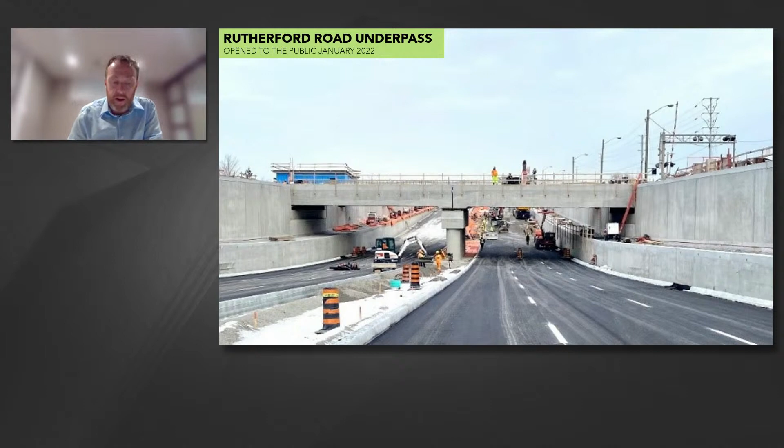Our next project is Huron-Ontario LRT. First, a note on the name: when this line comes into use, it will have a new name, the Hazel McCallion line, recognising the long-time Mississauga mayor. That naming ceremony took place earlier this week. We will continue to call it the Huron-Ontario LRT for project purposes as we deliver, but that will be the new operational name for the rapid transit line when it comes into use.

The push itself will happen later this month, and that will allow us to start construction of the Port Credit station. There's actually another push box structure as part of this work, a little bit north of here, where the rapid transit line meets the QEW, the Queen Elizabeth Way. So there will be another one of these happening in the near future.

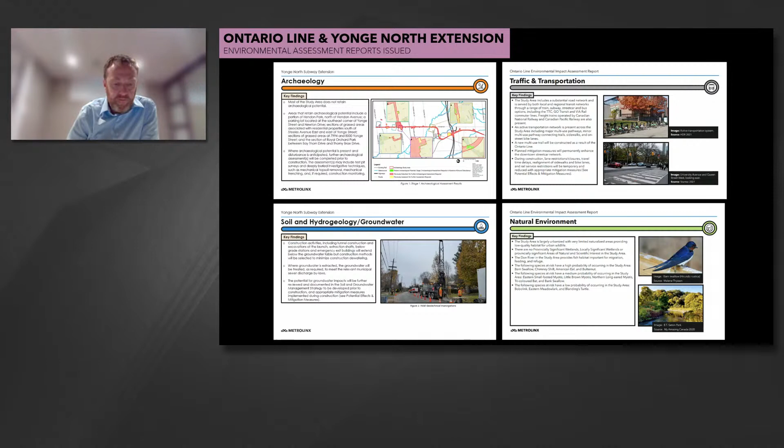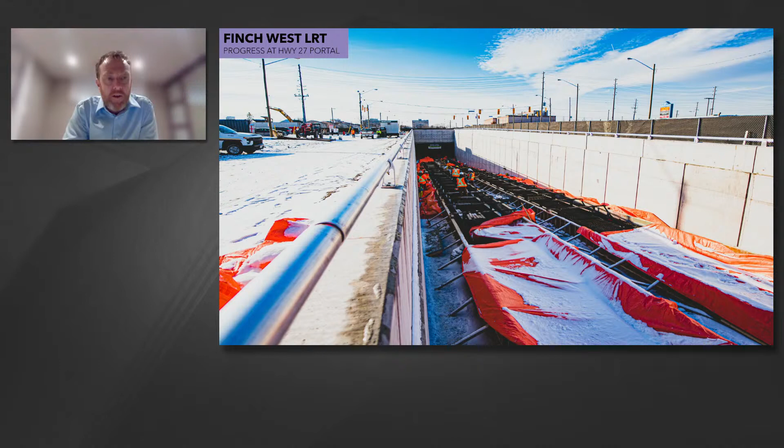This year we will have reached substantial completion of the maintenance and storage facility. We've laid 5 kilometres of track, 26 kilometres of storm, sanitary and sewer pipes, and poured 28,000 cubic metres of concrete. So just a few statistics on the huge amount of work happening on Finch West Rapid Transit, and great strides being made on that project.

Union Station Enhancement Project is absolutely critical to delivery of the GO Expansion work and the work to upgrade the existing network. It sits right in the middle of everything we're trying to do. Any delay here has the potential to drive through what we call the critical path of the GO Expansion works, and an impact to every area of what we do on the existing network upgrade.

So there was a huge milestone at the end of January when we awarded our project alliance agreement to the On Track Alliance for the Union Station Enhancement Project implementation phase, and that project is now up and running and really making significant strides through the first part of this year.

This is the first alliance in the Canadian public transport sector. It's a model used widely around the world for this type of project, but the first one we've used as part of this type of project here in this jurisdiction. So very, very excited to see this one off the ground. It gives us greater transparency, a greater element of cooperative and collaborative decision making, and we're very excited to see this model start to take root here for us.

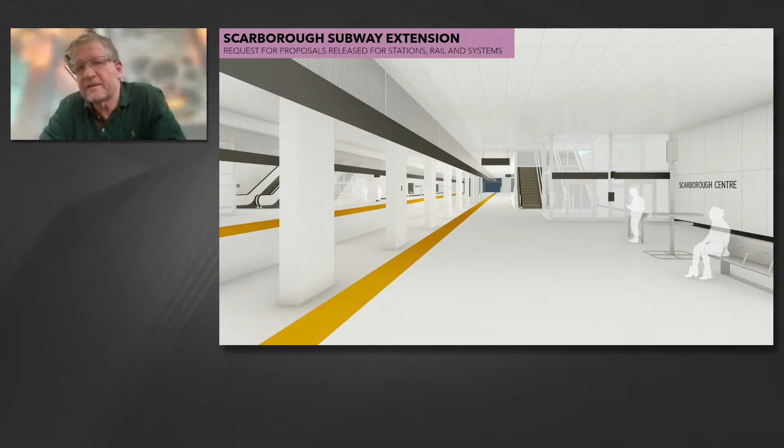And Matt, that's probably a sign of things to come, isn't it? With progressive design build contracts and even alliances, where that contract form is ideal for the risks we're dealing with. This is a significant shift for us with complex transit projects, away from fixed price lump sum contracts towards this direction, isn't it? Yeah, absolutely.

It segues very nicely into the next slide, actually, because Scarborough Subway Extension is another project where we, sorry, if we go back one slide - thank you. The Scarborough Subway Extension is another project where we really see the benefit of this more progressive and collaborative delivery model. Scarborough Subway Extension is being delivered in two main contracts.

An advanced tunnelling contract that's underway now and performing very well on the ground, with tunnel boring machines delivered to site and being constructed. And Andrew Hope will talk a little bit more about that in a second.

But after the advanced tunnel contract, we'll be looking for an SRS contract to construct the station and the rail systems, and that will be delivered under a progressive design build, which is a more collaborative form of contract, as Phil has just said, and one that we're looking to use widely where it makes sense for us within our huge portfolio.

So in early February, Metrolinx issued the SRS request for proposals to 3 shortlisted teams to invite them to bid on this contract. It has a lot in common with the Union Station Alliance model that we talked about.

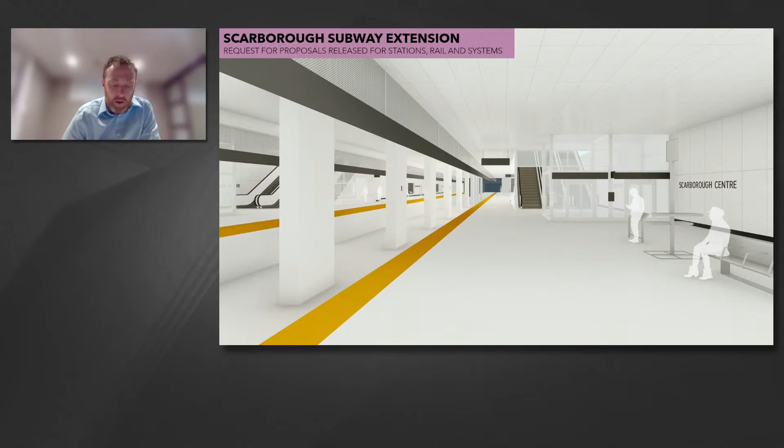As I said, for GO Expansion we're starting to see some benefits being realised. Some of our earlier projects are starting to come to completion - Kipling, Cooksville, Bramalea, Bloomington, all of these projects, and Rutherford as well, which we spoke about earlier. All of these projects are starting to deliver benefits for our customers, with new stations being opened at Agincourt.

So a huge amount of work is actually being delivered, but the purpose of this slide is really to demonstrate the amount of work moving from procurement into delivery. So we're going to see a huge amount of more work actually on the ground in 2022. Very, very exciting period for us - a massive amount of work happening both behind the scenes and on the ground now. Thank you, Matt.

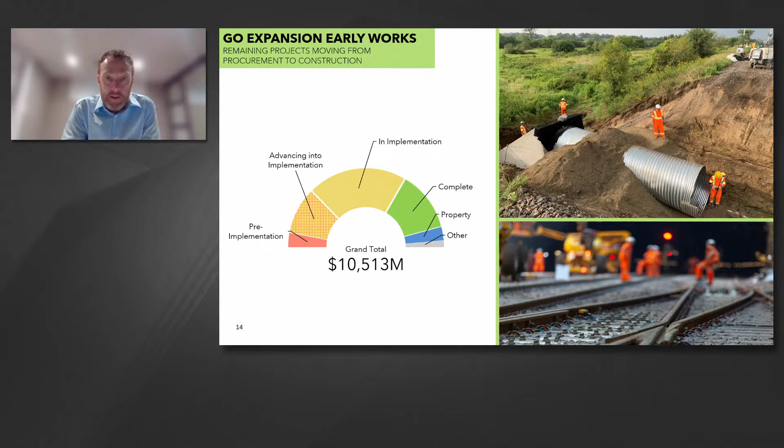There's certainly a lot of work going on, as you can see, and this is just part of what we're doing every day. So congratulations to you and your teams. Anybody, Robert, do you have a question?

Thank you, Chair. Thank you, Matt, for that presentation. And as the Chair mentioned, congratulations on all that was achieved in the last year alone. It is really quite stunning.

One comment, one question. I really liked your explanation of the South Concourse, as I've been seeing on social media from Metrolinx, with the other 2 concourses being York and Bay Street. When we do the South open concept, I think Ontarians and others that travel here for sporting events and entertainment, concerts and that, will be really excited by the open seamless concepts that will exist within Union Station, which today is quite a maze to access these things, and it'll be all open with retail. I think that's going to be very, very exciting.

My question is, with all this investment, which is really unprecedented under the leadership of this government, with all its funding partners, in both transit and transit infrastructure, I would say it's fair to say there's a consensus that communities that benefit from this infrastructure should also benefit by having the community benefits and supports derived locally. They should benefit locally from not only the infrastructure they're getting, but also the work that's being done. Can you speak to this?

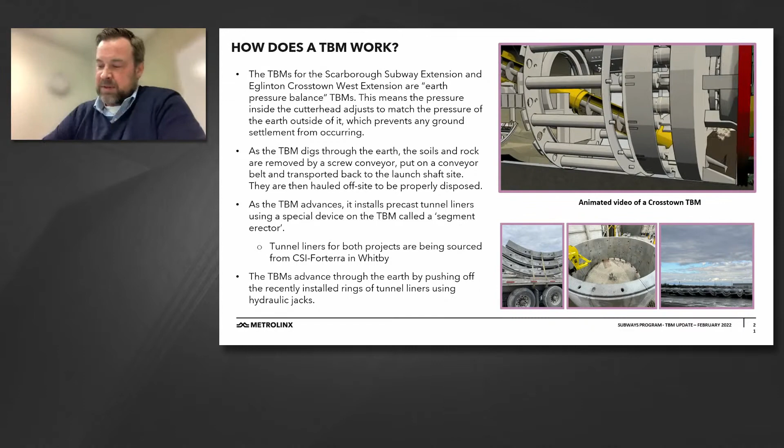Once the tunneling phase is complete, there's the concrete liner erection phase, where the concrete tunnel segments are brought in and put in place in a ring behind the tunnel boring machine cutter head and shield. Then there's these large hydraulic cylinders and feet that push off that last tunnel ring that's been installed, to force the machine and the cutter head to go forward. That process is repeated over and over again to construct the entire tunnel.

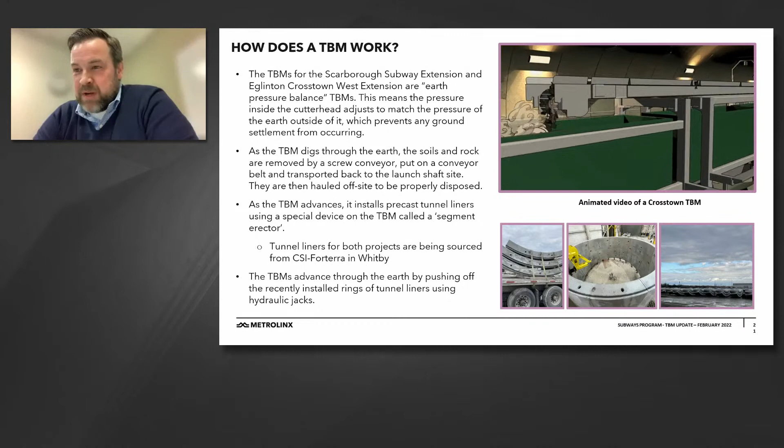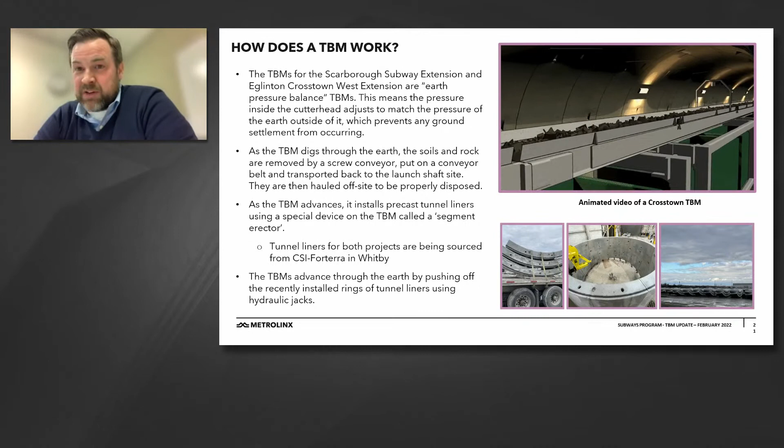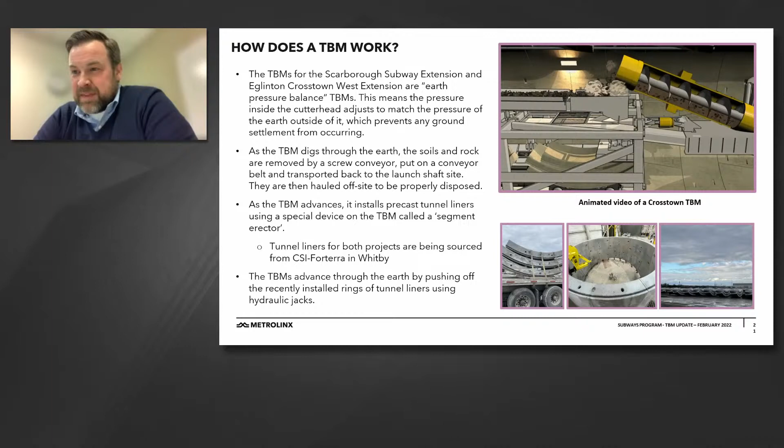So maybe that's the quick overview. I should mention one important factor here. You were talking about community benefits and some of the local suppliers and constructors involved in this process. The tunnel liners that are actually going to be used on both projects are all being manufactured by a company called CSI Forterra in Whitby, and they are now in the process of churning out the thousands of tunnel liner segments that will be used on both of these projects.

Okay, so just to wrap up here, this is an image, a couple of weeks old now, of the Scarborough launch shaft site at McCowan and Sheppard. You can see the large launch shaft itself, the area with the orange tarps at the top center of the image. It's about 26 meters deep, just wrapping up the actual excavation activities. You can see various parts of the tunnel boring machine that have arrived and are being reassembled on site, including the cutter head in the bottom right and some other components. So it's coming together fairly quickly.

Next steps for both: we should have the machines assembled and in the launch shafts by late March for Eglinton and April for Scarborough, and then we'll be commencing tunneling operations later this spring on both projects. So proceeding pretty much right on schedule, and in the case of Eglinton, just slightly ahead of schedule. Good progress on both projects. Maybe I'll stop there if there's any questions.

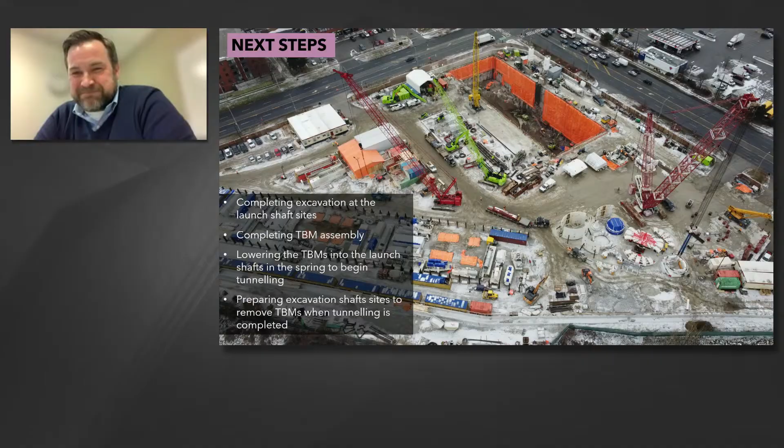Thank you, Andrew. Any questions anyone has? That was a very detailed summary and interesting to see everything. So thanks. My pleasure.

Now let's go on to our last item, which is an update on Let's Get Ready to Ride. I think Sharon's going to be doing this one. Great, thank you, Chair, and good morning. I'm very pleased to be here. I'll provide a brief update of our winter-spring sales and marketing activities. I'll also share some highlights of the Ready to Ride program so far, some successes across that program, and how that's informing the plans we have for the rest of the year.

So we're on the edge of a really optimistic time here. We're all looking forward to March 1st with the easing of most restrictions and returning to all those people, places, and experiences that we've missed. Throughout this pandemic, through the Ready to Ride program, our brands have provided very safe, very reliable, and very responsive products and service levels, meeting those changing demands of customers over time. And we've learned a lot.

But I wanted to share 3 really compelling insights that are informing our plans going forward.

First, there were many net new customers that we attracted to the network. New riders, just in April alone, accounted for almost 43% of our active fare cards and 38% of our Presto boardings. That doesn't even include the number of net new riders we assume are coming from our e-tickets channel. So attracting new segments is going to be a big focus for us through '22 and '23.